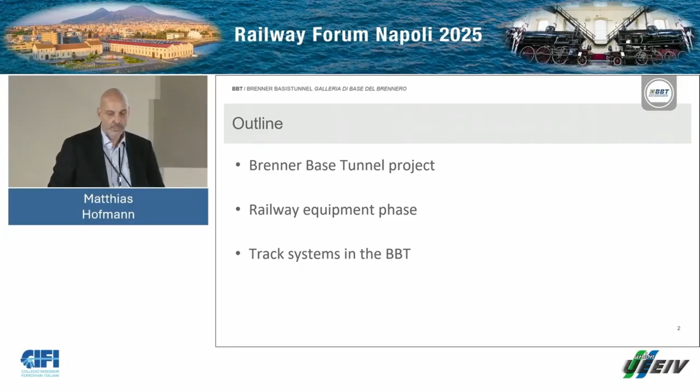As an introduction, I will show an excerpt of a video of the BBT, which gives a good introduction to the project in general.

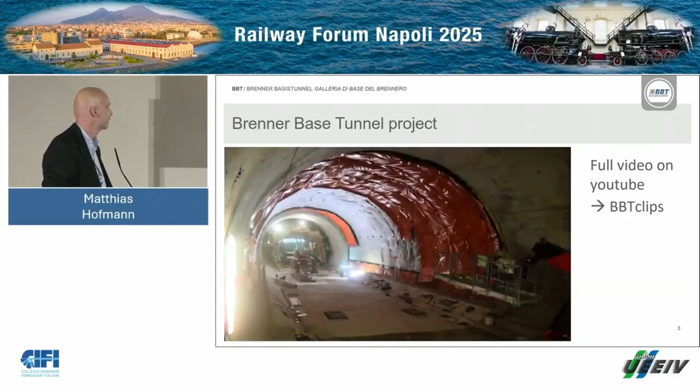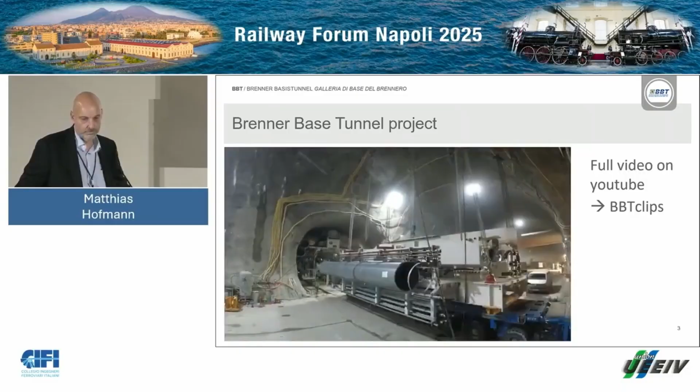Engineers, planners, geologists, miners, and many other professionals work constantly, tirelessly, tenaciously, with precision and skill, 24 hours a day, 7 days a week, on one of the cross-border projects of the century, the Brenner Base Tunnel. All the different groups working on the construction sites and in the offices are like gears that mesh to drive this infrastructure project forward. Implementation takes place step by step, like the steady ticking of clockwork.

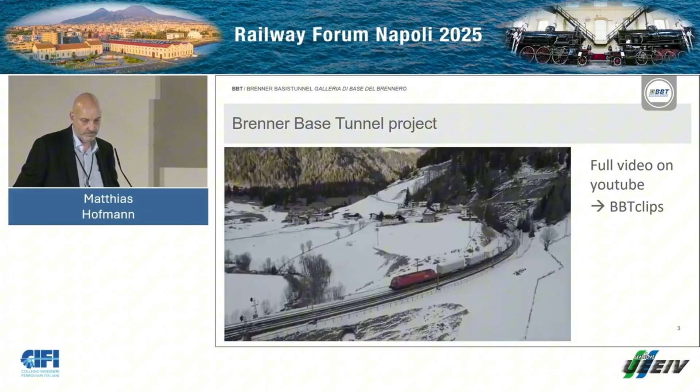The Brenner Base Tunnel is one of the largest infrastructure projects in Europe, as well as the longest underground railway connection worldwide. A goal Austria and Italy are working towards together, a project that will unite Europe. Once the tunnel goes into operation, travel time for passenger and goods trains between Innsbruck and Fortezza will be significantly reduced, with passenger train travel time cut from 80 to 25 minutes. North and south of the Brenner Pass, this will be a significant improvement for residents and travelers.

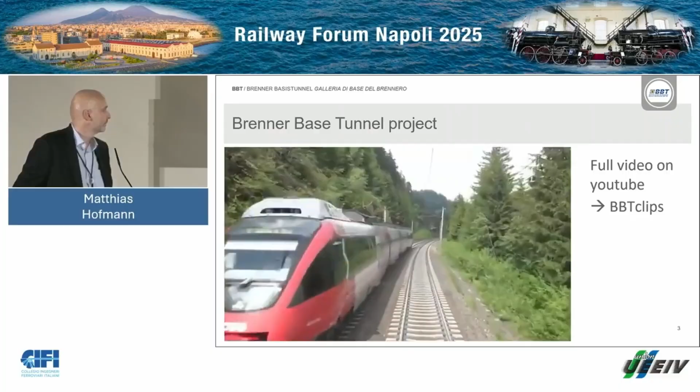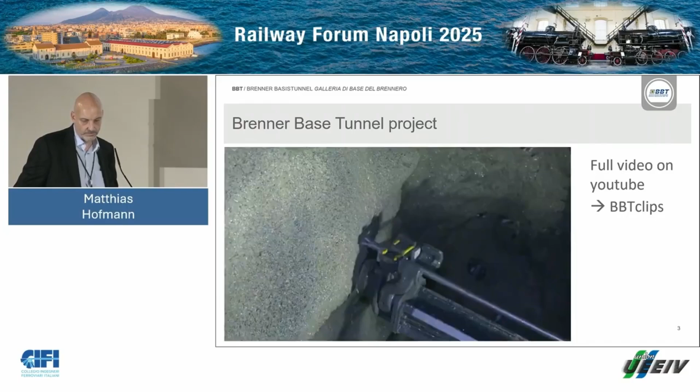If you want to get past a mountain, there are 2 ways to get to the other side: either travel over it with many steep curves uphill and downhill, or go straight through it underground. A lot of people are working on the Brenner Base Tunnel to build the direct underground railway connection between Innsbruck and Fortezza, a railway tunnel at the base of the Alps, offering the advantages of a flat railway over a total length of 64 kilometers.

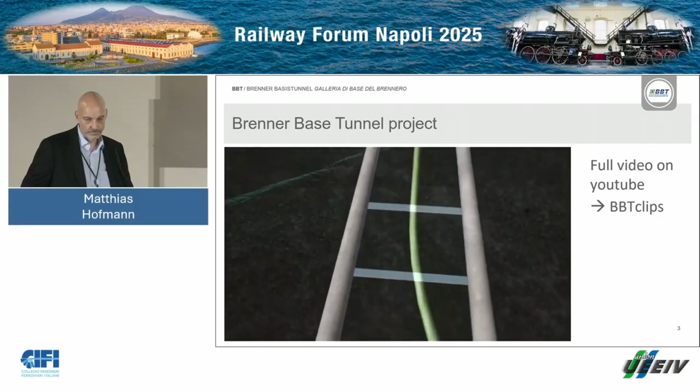The Brenner Base Tunnel comprises more than 220 kilometers of tunnel tubes: 2 main tunnels for the tracks with a diameter of about 8 meters and a cross passage every 333 meters. Between those tunnels, and 12 meters below, is a 3rd tunnel, the exploratory tunnel, which is 6 meters in diameter. This is driven before the others to understand the nature of the rock mass and to find out exactly what kind of rock to expect.

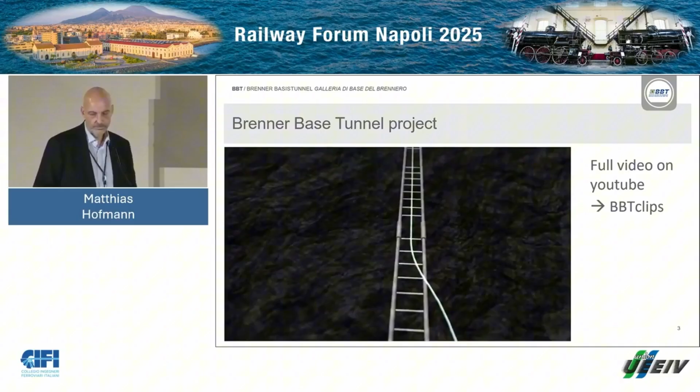Once the Brenner Base Tunnel has become operational, this tunnel can house technical equipment and be used to carry out maintenance work. The 4 lateral access tunnels in Mauls, in Steinach am Brenner, in the Ahrental Valley, and in Ampass are necessary to advance deep into the mountain and excavate the tunnel system from there on several construction sites simultaneously.

It's available on the YouTube channel, so please feel free to watch it in full length.

So why is the BBT built? Here is a sketch of the traffic route between Munich and Verona, and I'll explain the diagram below. On the left side is the traffic currently going over the Brenner Pass, roughly 150 to 160 trains per day, mainly the green bar representing freight trains.

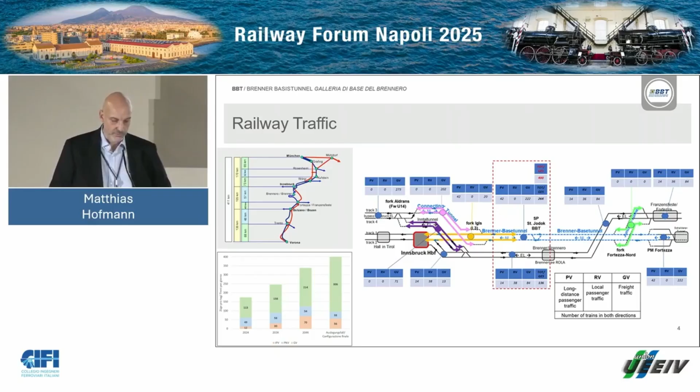The expectation is that in several years, say 1 or 2 decades, when the Brenner Base Tunnel is finished, this will triple, so there will be roughly 400 trains per day over the Brenner, of which 300 are freight trains. That is the need for the Brenner Base Tunnel. For the whole concept of Europe, the Brenner Base Tunnel is part of one of the 9 Trans-European Network corridors, the Scandinavian-Mediterranean corridor, which goes from the very north of Europe down to the south of Italy, connecting 7 countries, with a length of approximately 9,400 kilometers and connecting 110 million people.

On the right side you see again a sketch from Munich to Verona, where the Brenner Base Tunnel is a centerpiece. The special nature of the Brenner Base Tunnel is that it's a cross-border project, meaning I have 2 concepts, 2 nations, and have to sum it up in one project, let's say.

So the Brenner Base Tunnel, in principle, as we talked about before, is a blueprint of the Gotthard Base Tunnel, because it was built before and provided a good base for copying. But there's one important difference, which is this exploratory tunnel below.

And the name is not totally correct. It was for exploration at the beginning, it was for drainage of water at the beginning, conceived, but now it will be used heavily for the equipment phase and for the operational phase. For that, there were shafts built every third cross passage, so every 1,000 meters, you have the ability to go from the exploratory tunnel during operation of the trains up to the cross passages where a lot of equipment will be placed, as well as near the exploratory tunnel, so you can do a lot of maintenance work 24/7.

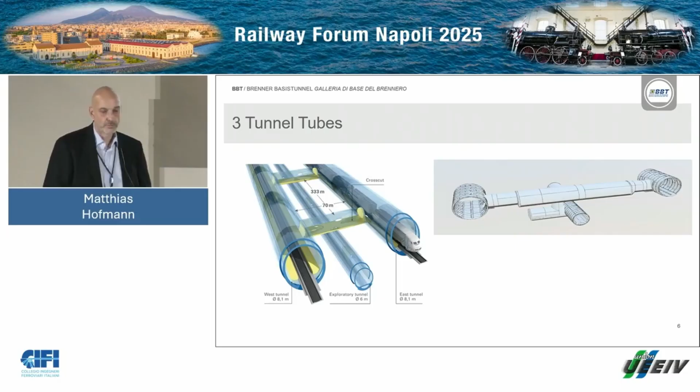So here again a sketch of the whole system, Innsbruck on the left side, Fortezza on the right side, and the whole system, as shown in the video, has a total length of 230 kilometers, of all this main tunnel, exploratory tunnel, access tunnels, and so on. And important is also the link to this existing bypass tunnel, the Verbindungstunnel Innsbruck, Umfahrungstunnel Innsbruck.

And with this connection, so from Innsbruck to Fortezza, the length is 55 kilometers, which would be a little bit less than the Gotthard base tunnel. So we made this connection to the existing tunnel, so it's 64 kilometers, and so it's the longest underground railway connection in the world. One word on the ongoing civil engineering and construction works.

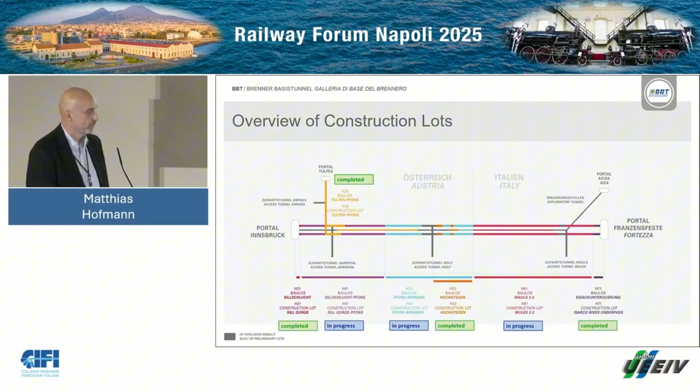This is a plan view, a schematic plan view. This large project is divided into many small pieces for excavation, and the different colors show the different construction lots. A lot of them are completed, but 3 of them are still in progress and will last for the next 2 or 3 years.

So, to sum up, there are in total 230 kilometers to be excavated, 90% are already excavated, so some 25 kilometers are left to be excavated, which will take place roughly in 1 year or a little bit more probably.

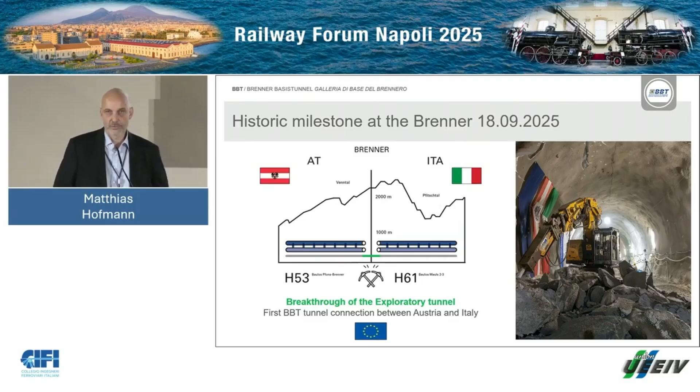The construction of this exploratory tunnel took 17 years in total.

So now coming to the railway equipment phase. Some basic numbers: the design speed for passenger trains is 250 kilometers per hour, whereas for the freight trains it is 160 kilometers per hour. The train length is designed to be 740 meters, and the system is deployed with ETCS level 2.

Another compromise required signaling. Usually you would operate it from one side for the whole tunnel construction. It was a long discussion, and it was decided that here, at the border between Austria and Italy, the Austrian part will be operated from the Austrian side, from Innsbruck. In blue is the new Brenner Base Tunnel, in gray or black below is the existing line over the Brenner Pass. And in principle, the same goes for Italy, that the two tracks are operated from Verona.

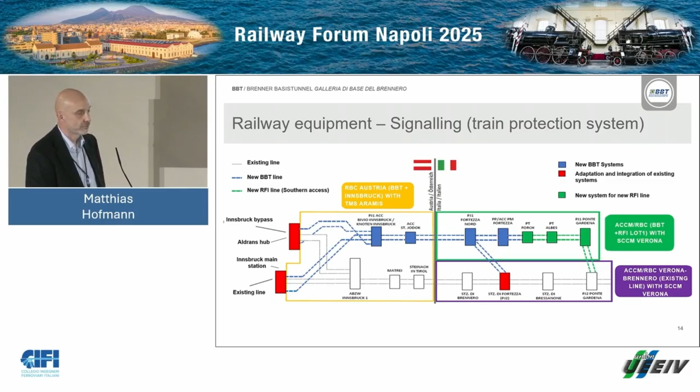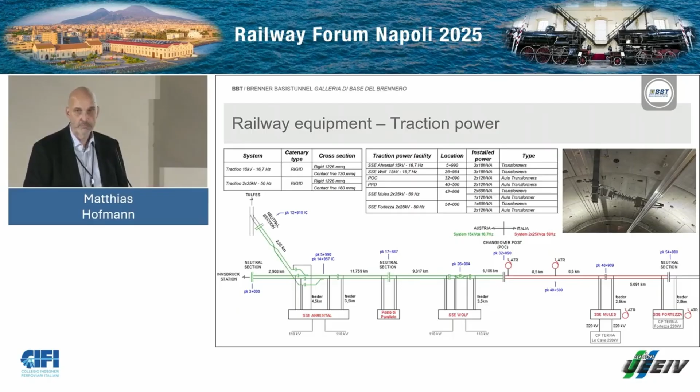Another lengthy discussion was about the traction power system, and finally, again, a thing which is not logical at first sight: there will be a separation of the track power systems. In Austria, here in green on the left side, there will be the standard traction power system from ÖBB, which is 15 kilovolts and 16.7 hertz. Whereas on the right side, here in red, there will be the traction power system with 25 kilovolts and 50 hertz, which means there's a power-free section underground, some 1.5 kilometers below ground.

And there are other railway equipment issues. I won't go into detail, because in future we will focus on the slab track going forward.

Before that, a quick outline on the time schedule. A project like this, similar to the Gotthard Base Tunnel, lasts roughly 20, 25, 30 years. In our case, it started in 2004, 2005 with the authorization phase.

There, the civil works as well as the railway equipment works were first designed and given to the official bodies and approved. Then the focus was on the civil engineering construction for the next years, from 2008 on, where the approval was here. And now we are here in the middle somewhere, where in parallel last year the design update or optimization of the design of the railway equipment took place.

One important update is that the exploratory tunnel will be used as a service tunnel in future, meaning as much work as possible will take place using the exploratory tunnel or service tunnel. We hope this will have a great benefit on the availability of the track, of the railway system. Then the plan is next year or the year after to make the build tenders for the railway equipment phase.

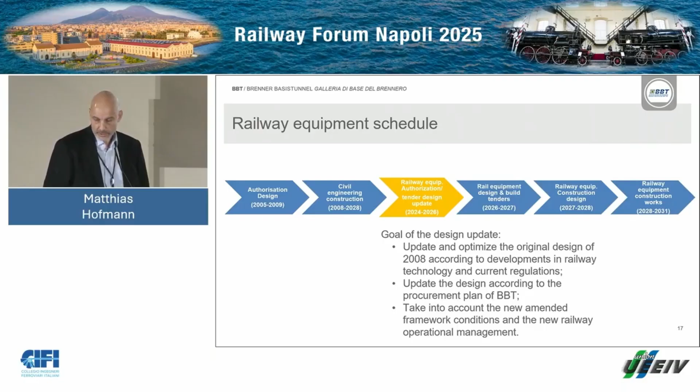So, let's come to the track system in the BBT. We have all kinds of track systems in there. The main track system will be the SLAB tracks, and a certain area will be built with a mass spring system. But we also have ballasted track systems, and so we have transition zones between these systems.

Regarding the tracks, the SLAB track system has the principal requirement that it must fulfill the requirements of Austria, of Italy, as well as international standards, mainly the TSI. In the first phase, in 2005-2009, it was decided there will be precast slabs used, laying on the base layer and possibly with a separating layer between them, like we heard yesterday some examples. The width and thickness are standard, roughly 2.5 meters and 20 centimeters height respectively. This is typically the system widely used in Austria and Italy at the moment.

Regarding the rail itself, it has to fulfill the typical specific Eurocodes, and the standard track gauge is of course roughly 1.4 meters.

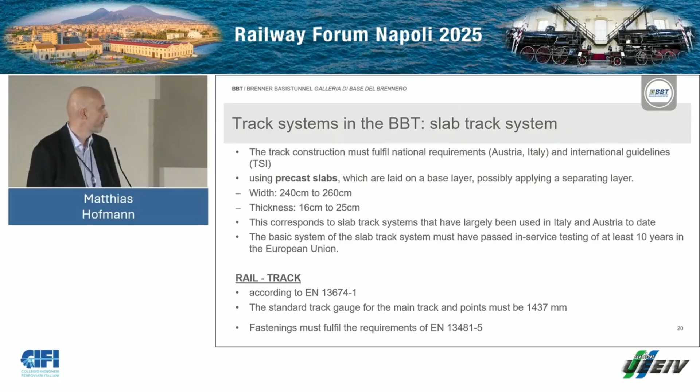There are also parts near the portal with low overburden and some villages and people living above. Especially in Austria, due to the existing Umfahrungstunnel Innsbruck, we know there is vibration transmission to the houses. So there will be a mass spring system added to mitigate these vibrations.

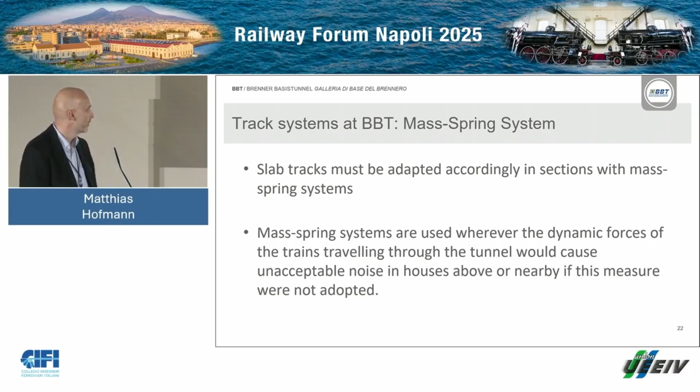Finally, there will be ballasted track areas, especially near the portals where the existing tracks will go inside the tunnel for some meters with a ballasted track system. I will come to it in a minute.

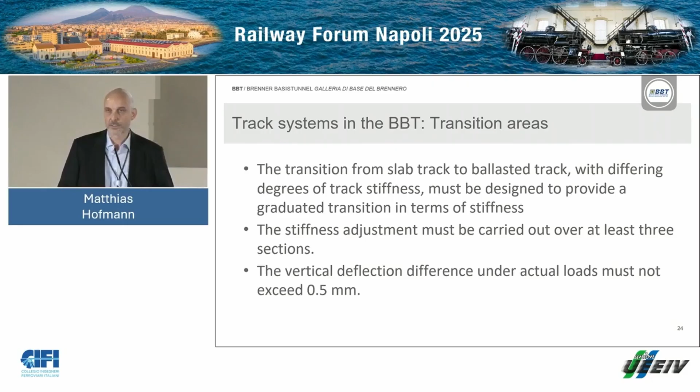As there are different systems, there are transitions between them. I saw there will be a presentation afterwards, so I won't go into detail, only that this transition has to be in several steps, and the differential deflection between the steps must not exceed 0.5 millimeters.

The reason here is because this is a very difficult geological structure. The slope is not stable - actually 'not stable' is the wrong word, it's a creeping slope. So there's the possibility that the whole tunnel can deform some centimeters up to decimeters, and with the ballasted track we have the possibility to readjust the rails.

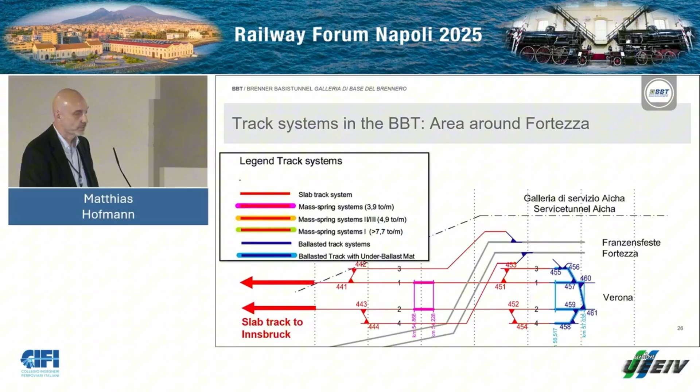With that numbers, I come to the end of my presentation. If you would like further information for the introduction, please go to our website, there is a lot of information there. And with that, I thank you very much for your attention.

Here are some quick technical details about the tunnel. This tunnel passed through residential areas, so the cut and cover method was chosen to reduce noise and improve safety. Inside the tunnel, we used a slab track system instead of ballasted track. This system is more rigid, needs less maintenance, and offers better long-term reinforcement. For the structural analysis, we use SAP 2000 software and consider UIC LM71. For materials, we use high-strength C30 concrete and S420 reinforcement steel.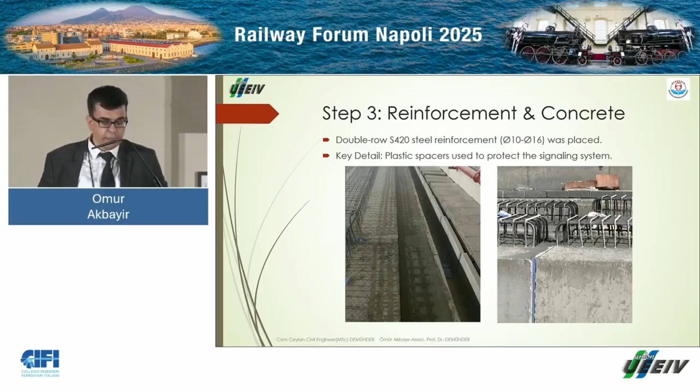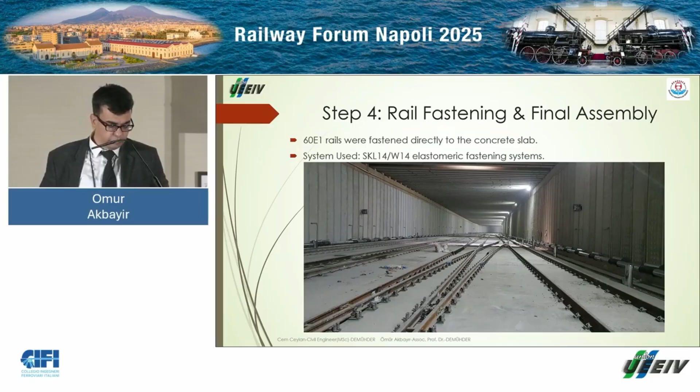Finally, step 4, rail fastening and final assembly. 60 E1 rails were fastened directly to the concrete slab using the elastomeric fastening system. This system reduces vibration and allows thermal expansion. As you see in the photo, we integrated 4 large switches or turnouts directly into the concrete slab. So, we built this rigid track.

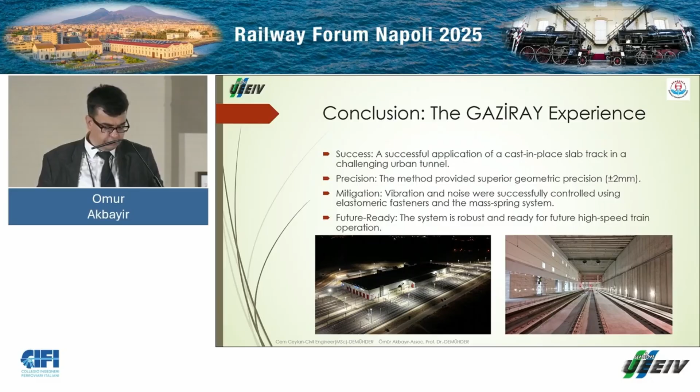In the existing tunnel, you can see the tunnel vault. The tunnel vault is done with natural brick stones, with natural stones. You can see already the existing slab track. The existing slab track was installed in the years 1992 and in the years 2004. Under the slab track, you can see the base channel, the drainage channel, and on the side, the cableways.

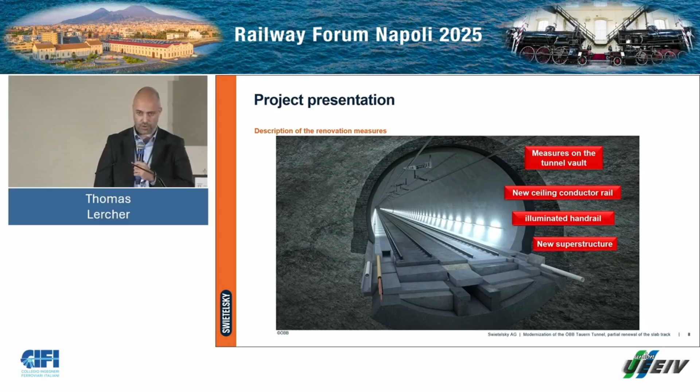The new tunnel should look like that, and it does. There were heavy measures on the tunnel vault. You can see not anymore the bricks. It was shotcreted. A new ceiling conductor rail, illuminated handrail, and the work we executed, the new superstructure in 1/4 of the tunnel.

As I mentioned, you can see here an overview of the tunnel itself. Here you can see track 1, you can see track 2. Track 1 was renovated in the year 2004. Before that, both tracks, both lines, had the ballast track.

In the year 2004 they installed the ÖBB-Porr plate system, slab track. Even in 2004, they did like 1 kilometer around the northern portal and 500 meters in the middle of the tunnel. And 12 years before, in the year 1992, they did also the plate system from ÖBB-Porr, slab track system, and a single sleeper system, also by ÖBB-Porr, the single sleeper system with roughly 4.2 kilometers. And exactly this red area was the heart of our construction site. This single sleeper slab track system we had to change.

We did not change only the slab track system over the 4.2 kilometers. Additionally, in the remaining three-quarters of the tunnel, the whole track in the north part and the south part, we changed the rails, and we also replaced the supporting points, the screws, and the fastening systems.

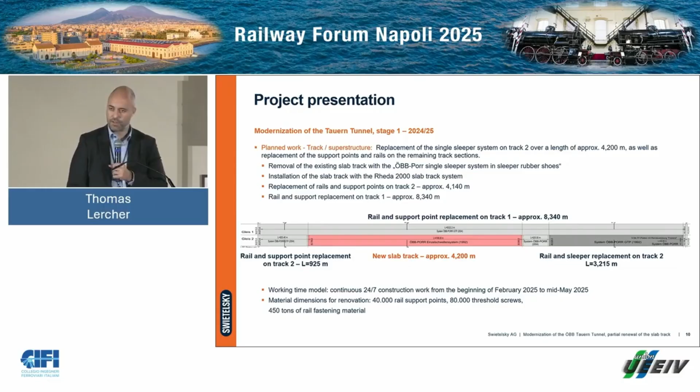Now the system overview. As I mentioned, there is a single sleeper system inside these 4.2 kilometers, built in 1992. The single sleeper system is in rubber boots, rubber shoes, and is grouted under the sleeper with a 4 centimeter thick grouting concrete, and underneath this grouting concrete a 14 centimeter thick layer of reinforced sub-base concrete.

From the fastening system, there are W14 rail fastenings, and they are installed on the single sleepers.

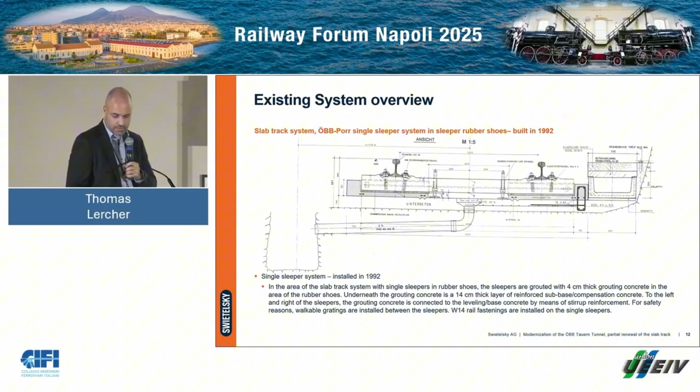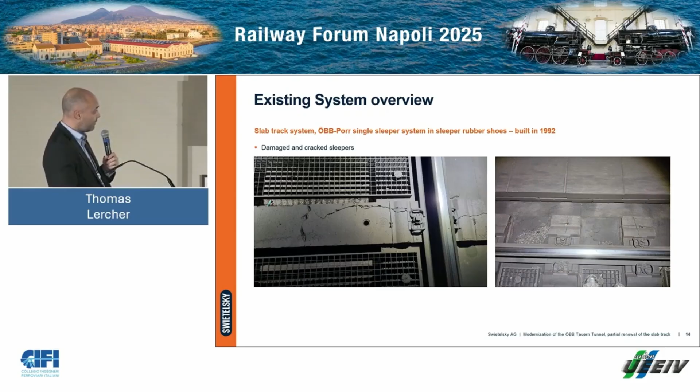I brought some pictures directly from the construction site. You can see here the old single sleeper system. Now you can see the reason why we had to change this slab track. The reason was that the old sleepers, the single sleepers, got already cracked, quite many of them. I brought some pictures.

We decided to install, instead of the single sleeper system, the Rheda 2000 sleeper system, with the system we already heard about yesterday in the presentation from RAIL.ONE.

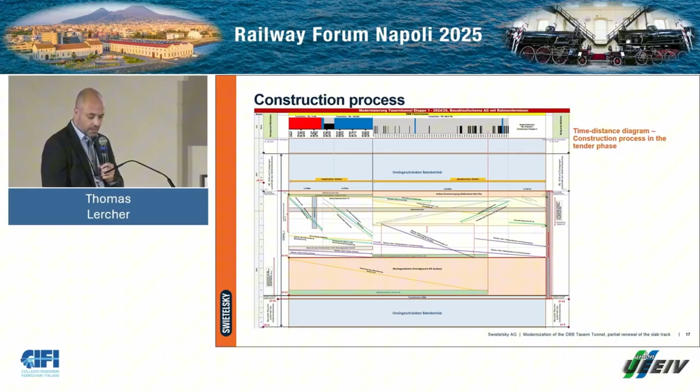Out of the first time distance diagram, of course, during the construction phase it becomes more and more detailed, and became quite long already. I'll show you some details out of it. As a construction company, we did it in our mother tongue, German, but I will explain the working steps in detail.

We had to do some cleaning work. We started in the south doing some cleaning of the existing tunnel, and we had already to do the taking out of the old slab track. We removed it as fast as possible, deciding to do it with 30 meter track panels and our railway crane.

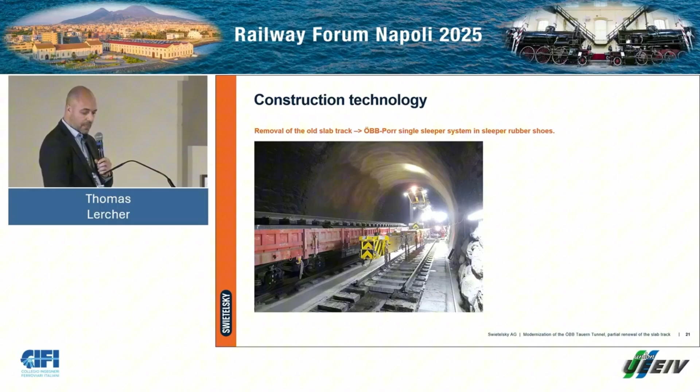We removed these 30 meter track panels and loaded them with the crane onto flat wagons parked on the neighbor track. These track panels we then moved out from the tunnel and brought them for disposal. That worked quite well, quite fast.

Of course, the remaining slab track, the concrete and the rubber boots you can see in these pictures. The rubber boots we then also put out with the excavators and could then clean the surface.

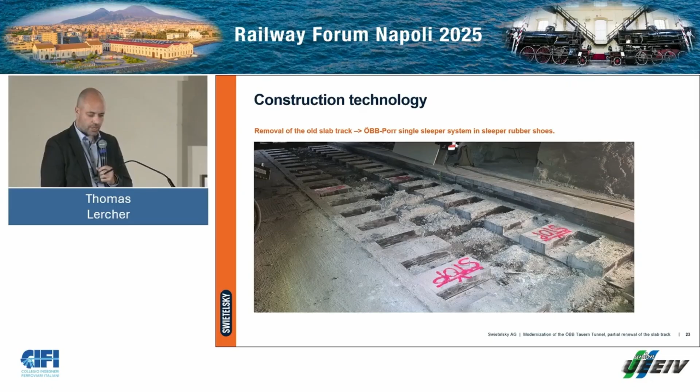Next to taking out just the track panels, we also started in parallel to change the rails and the fastening systems. I will not go into detail, but here you can see all the parts we had to change, starting with the rails and changing all the fastening systems over the 12 kilometers where we did not change the slab track.

That was the tunnel we found. You can see now why I said there were quite impressive works to do to get rid of the water inside the tunnel. There were heavy contaminations inside because of the 120-year-old tunnel vault. Of course you can imagine that all this water and heavy contamination is not good for the fastening system, not good for the infrastructure inside. Because of that, the tunnel had to be renovated and we had to change the fastenings and the rails.

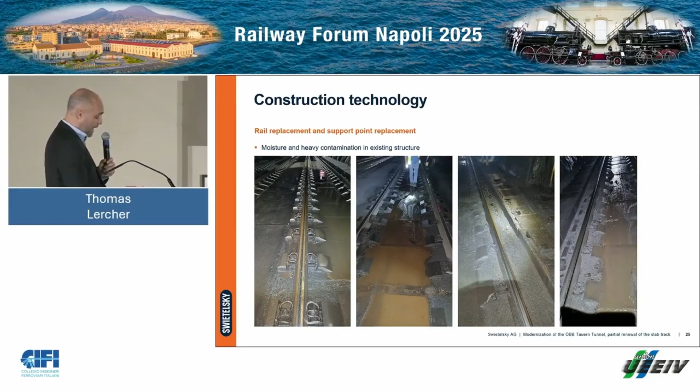What happened because of all this water? We found screws like that. So mechanically loosening these screws was definitely not funny.

And we even had broken materials, a lot of broken materials inside of the tunnel. When we tried to open the screws, they had, of course, looked like that. So how to get them out?

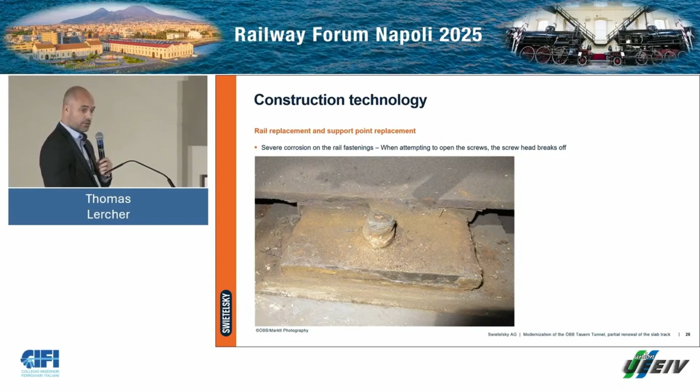We were really lucky that ÖBB is really experienced in that already. Over the last years, they even designed and developed materials and special tools to get out these screws. So in cooperation with ÖBB, thank you very much for that, we could also build a drilling machine like this one. We built 2 drilling machines and also invested in many special tools to get out all the screws. I will not go deeper into details how we got out the screws. Maybe in the next coffee break or lunch break we can talk about it. But it worked quite well.

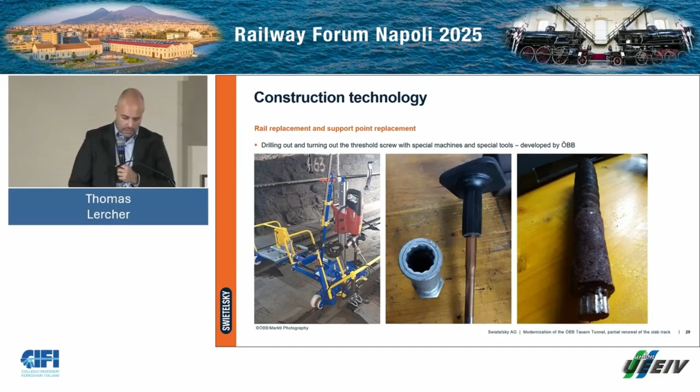As I mentioned before, it was planned to come to a hard bottom, to stone or to concrete. What we found was the old ballast from the ballast track, from before the year 1992. So of course, on this underground, we could not place the new slab track. We had to dig out about 3,500 cubic meters of old ballast, remove it, and transport it out with the tipping wagons onto the neighbor track.

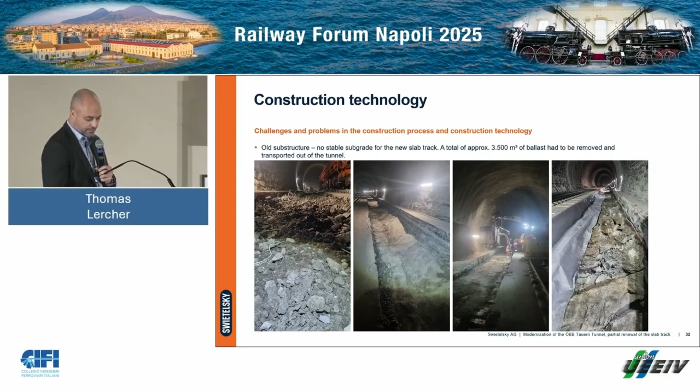That was then the cleaned surface of the underground. Here you can see it really well, it looks like the moon. And it was prepared to concrete and to put in a layer of concrete.

We had other challenges and problems during this construction because the old cable channel, which was already more than 30 or 40 years old, got broken too. We could see that already in 1992 they had to fix it there. So this we had to remove and change.

Also the drainage channel in the middle of the tunnel was done with natural stones, with rocks, of different sizes. You could see it here. Of course, these rocks were integrated into the concrete of the old slab track. So we even had to cut the rocks so that the drainage channel would not break down completely, in order to reach the 2.5 meters of space we needed for the new slab track.

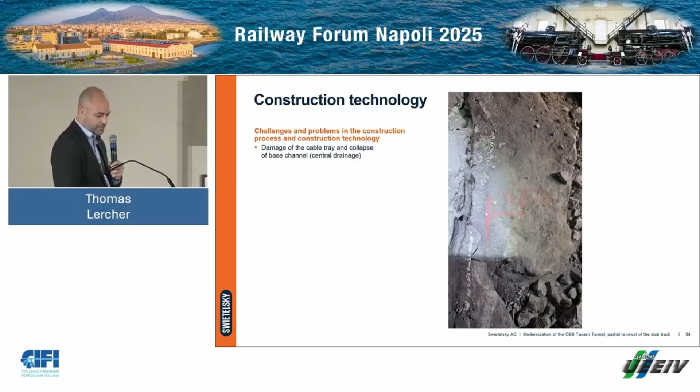So when we reached this point, everything worked according to plan. From this point onwards, everything worked in plan. The old system was deinstalled. We could concrete the new leveling concrete, the base layer. We did it with conventional mixer trucks, going in with wagons and filling in the concrete.

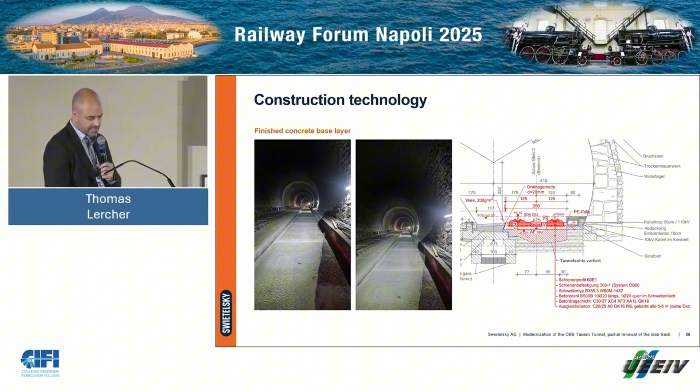That was the finished concrete base layer. You could see in the design it was planned that we have a good base here. We had to fill in all this concrete, and of course we also had to fix some parts of the base channel.

The next step was to put in the sleepers. We put the sleepers there conventionally with our excavators. That was working quite smoothly. Then we put in the reinforcement.

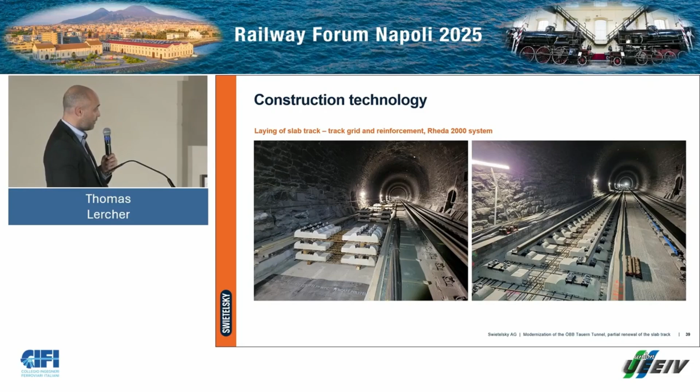Then installing the lifting and alignment system. For the lifting and alignment system, we also had to be a bit smarter, since we could not install it on both sides. Usually you can install it on this side and on this side, and just by putting pressure on the bars bring it into the correct position. The lifting work was easily done with our spindles, and we had to develop the alignment system so that we can fix it on the rails from the neighbor track and on the rail from the new track, and do it with the tensioning parts, so that we can tension it and also press it to the correct level.

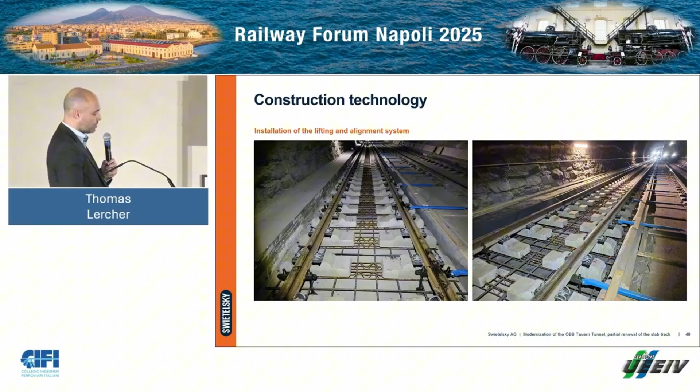Afterwards, we went for concreting. For doing the concreting, we made some examples, some tests. You can see here that we formed these boxes with a piece of sleeper and a plexiglass, and we could then see in the video, when we fill in the concrete, how it reacts underneath the plexiglass.

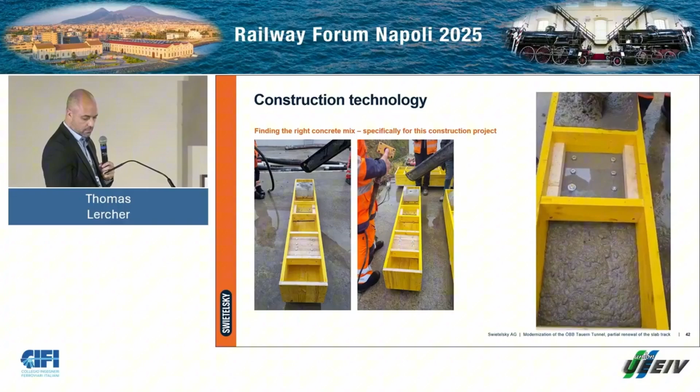Worked quite well. We unpacked these boxes. First results, we were not happy, definitely not. You could see that air was on the surface and water was on the surface. And finally, we became better and better, and we found our correct recipe.

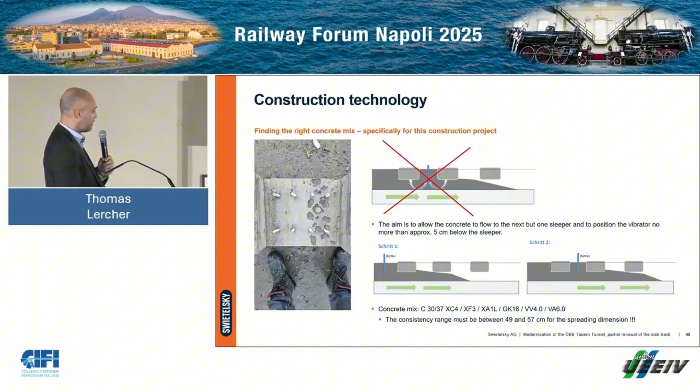We put in the concrete with a paver. On the paver were mixers installed, what could mix the concrete once again. And we put it efficiently on the construction site.

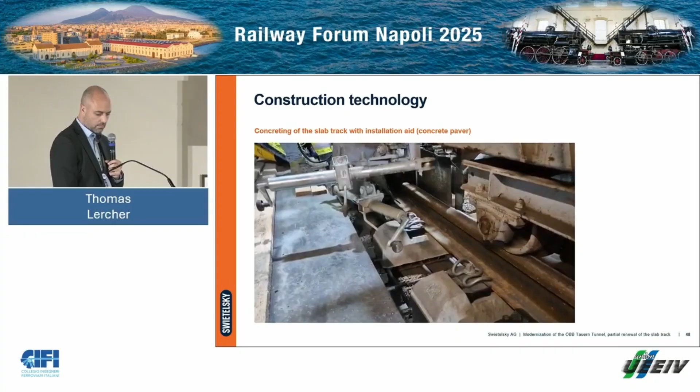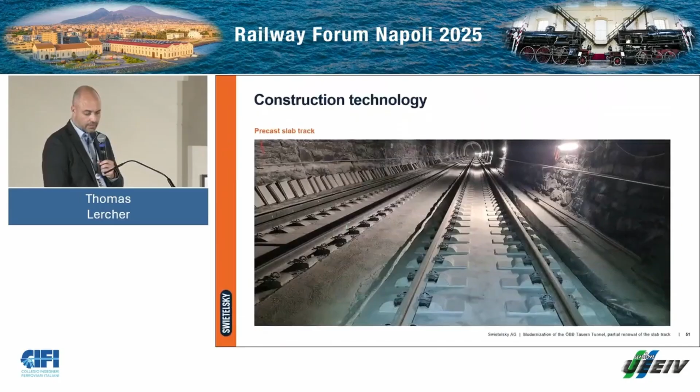You can see the concrete flowing and coming underneath the sleeper. Afterwards, doing the concrete surface, conventional, bringing on the applicated evaporation protection layer, and we had our new slab track installed.

The last steps have been welding of the rails, transporting out of the tunnel the old rails, and the project was done. Thank you very much.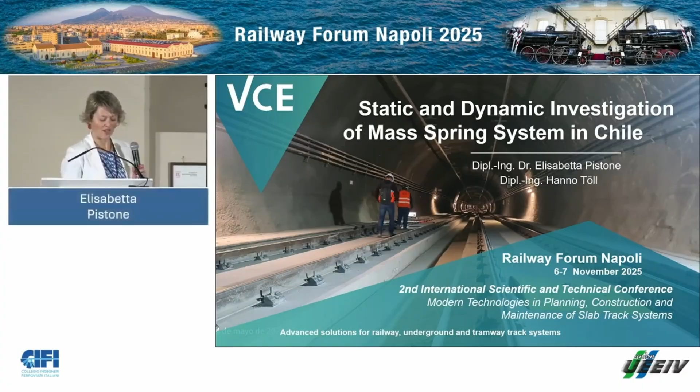I will briefly go through an introduction of the project. I will mainly concentrate on vibration studies, although I will briefly talk about static and dynamic design and the construction and manufacturing as they have influences on vibration studies. And I will finally elongate a little bit on site measurement, which is something we have not been hearing so much in this conference, in this forum.

Before that, I will spend a few words on VCE. Although many of you know us and we have a long-standing and successful collaboration with some of you, I think it is worth mentioning that we are an engineering office with headquarters in Vienna, although we have branch offices also abroad, mainly depending upon request of projects, I would say.

We cover pretty much all the fields in engineering, spanning from bridge design, track design, traffic, noise and vibration—this is my department—life cycle. In the last years, we also had the development of BIM, and research and development is always the key. It was founded around '86. We have more than 350 employees, experts in different fields.

And our projects cover pretty much the globe, I would say. Of course Europe—Germany, Austria, Italy, geographic Europe, as UK. But we also have, like yesterday my colleague explained with POR as well, some projects in Qatar, we have in India, and here we go in South America.

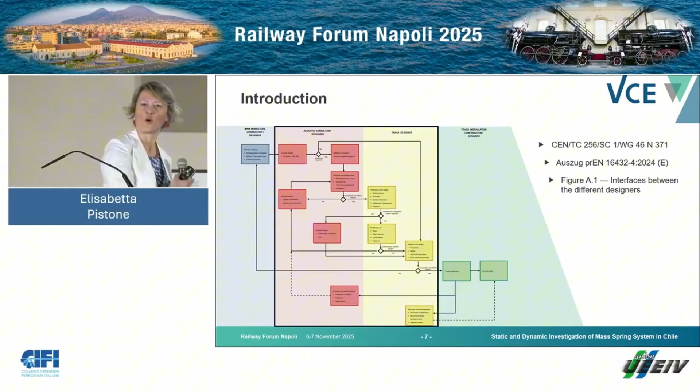From a theoretical standpoint, when it comes to acoustic and vibration, this should be the path to follow. Although it seems either a series or, for some aspects, a parallel system, it is actually a loop system, which means that each block at the end of the process had always to answer a question: yes or no. If yes, you could proceed to the next phase, which maybe leads to another interface. If no, then you have to go back—meaning to optimize the system, change something, revise what you have done.

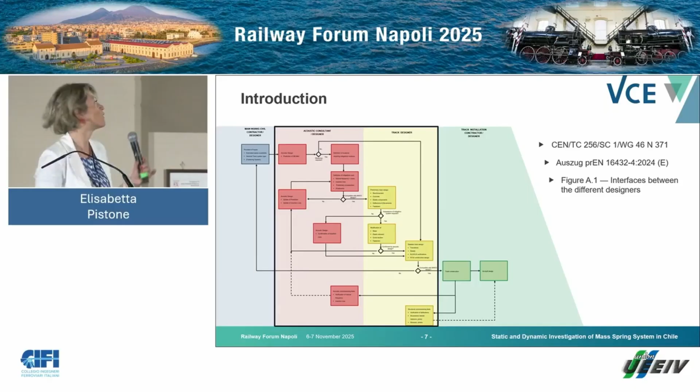For instance, in the case of noise and vibration, if you have a definition of the mitigation system, you have to calculate natural frequencies, insertion losses, preliminary cross-section. If this is compatible with the main civil construction work, you could proceed to the track design, for instance calculation of preliminary reinforcement, concrete, and so on. And if adaptation of the mitigation system is required, then you have to go back and readapt and optimize your system. Otherwise, you could proceed. This is pretty classic—seems easy, not always so smooth.

As far as vibration prediction is concerned, the main key point to answer is always the calculation of emissions, which comes from a contribution of different aspects: train emission, insertion losses, soil—of course propagation through soil—the coupling with the building, as well as the building transmission itself, and a safety factor always included to account for uncertainty.

So if you look at the picture, you have a source, a train passing, for instance, in this case, in a tunnel, presuming a tunnel, so we have a certain depth, which will have its own insertion losses depending on the system you consider. The vibration will propagate through the soil, which has an influence until it reaches a building.

Of course, when you analyze a line, on the old map, you cannot take every single building along the line. You have to spot what is called a sensitive receiver. In this case, we are following the FTA, which means receivers, buildings I would say, that could be representative for a category. So it could be depending upon usage, residential rather than schools, and also about importance and vicinity with the rail.

Then, of course, the vibration propagation will reach one of the sensitive receivers. So let's say the building will transmit through the foundation, depending on which they are, and then it will propagate through the building itself, so depending on the stories with the transfer spectra. So this was the image, and of course the process according to FTA is very, very similar.

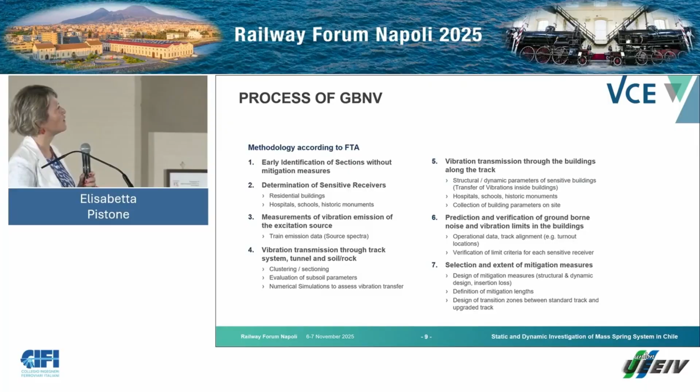So you have to determine, as I was saying, the sensitive receiver, measure the vibration through the excitation source, so the train in this case, which will go through the soil itself to the building until you can calculate and predict effectively the ground-borne noise and select if you need mitigation measures. Could be yes, could be no. If yes, into the detail, which ones are they?

They actually chose 4 different systems. One was sections without any mitigation measure according to their analysis. One system was with elastic rail, so elastic soil, and 2 mass spring systems. The same exact mass system, the only difference was the thickness in the elastic mat. In one case it was 40 millimeters and in the other case 50 millimeters. Why? Because they had constraints upon the frequency.

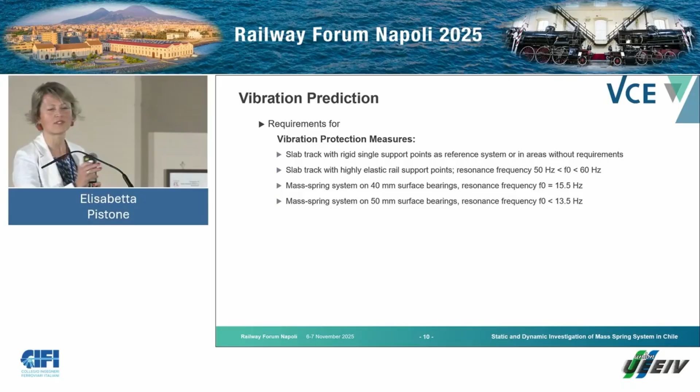We can discuss optimization at a different stage maybe, but these were the requests. So one was 15 hertz and the other was a little bit lower, so 13 hertz. So this is pretty much the mass spring system, and the difference was in the thickness of the mat that they adopted.

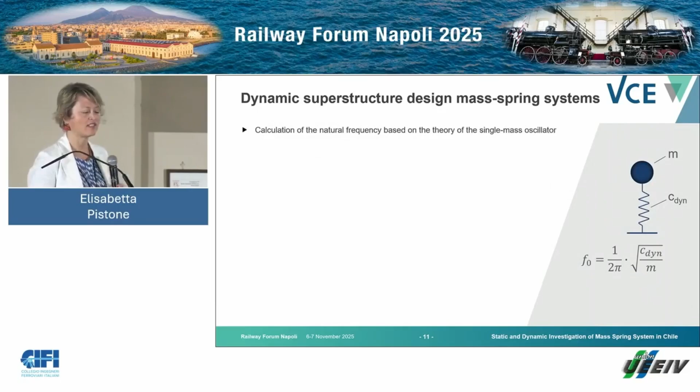We also calculated and performed an analytical study to determine the dynamic stiffness for the bearing and the effective dynamic masses. And of course we did static calculations in collaboration with another department to calculate the reinforcement quantity and the verification according to different states. I'm not going to elaborate a lot because this was just an input for us for the noise and vibration part.

After that, we were finally requested to test, and we tested both in part as a mock-up test, before putting it into place and operation. I'm not going to talk about this stage for sake of time.

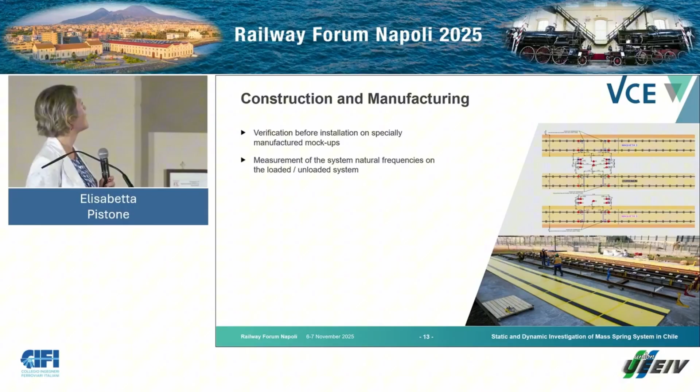I'd rather concentrate on the measurement when the system was put in place to detect the natural frequencies of both loaded and unloaded systems. And of course we also had to consider the contribution of soil because we were able to test it. Not always is this possible; sometimes you have to simulate this propagation. In our case, since we were able to test it, we could directly compute it.

So this was what the theory computed and what the mock-up test told us. And when we finally tested in reality, we could also take into account the ground correction. So the first step is to compute the insertion loss. The insertion loss is always basically a measure of the performance of a system that you are putting into place.

In this case, a mitigation measure, in comparison with a reference system. If you also want to add the ground correction, the right thing to do is to compute the transfer function, which is, you are performing a test on a system, so it's always an output of an input.

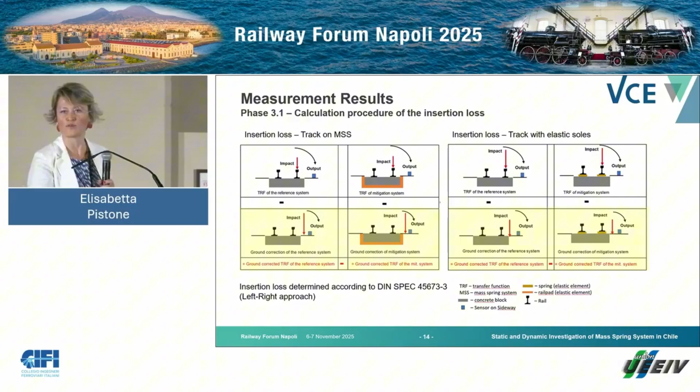You can do the same thing on the track with elastic soles. The difference between the two procedures is the location point for impacts, but the concept itself is the same.

In our case, we did three types of campaigns in situ. One was for the unloaded system, without impact, because you can have either static or dynamic impact - static impact is from a hammer, for instance, and dynamic is the train passing itself. So the first step was testing the unloaded system, to detect the natural frequencies that we had computed earlier from a theoretical standpoint.

There was a very good agreement, especially with the mass spring system. You could see the location of the impact and the receiver from section and plan, and the result of the natural frequency - so the natural frequency was actually proven correct.

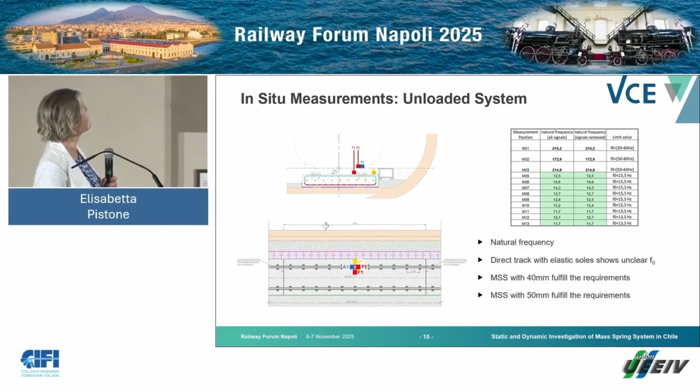We did the same, but then with the static loaded system, meaning we carried out 15 to 20 impacts with the hammer - this is pretty much what the norm says. Why? Because you have to average, in case of outliers, to increase the statistical population.

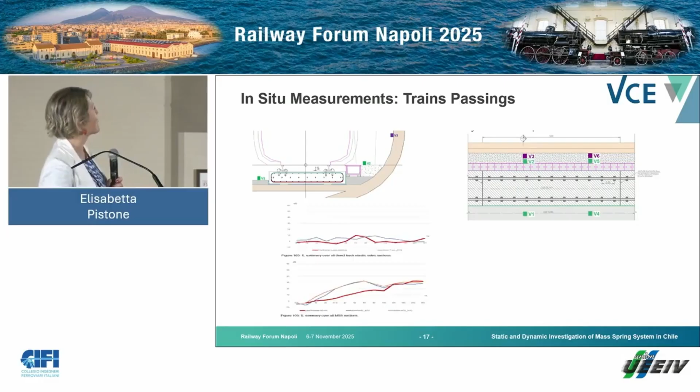We recorded train passing, with velocities around 50 to 80 kilometers per hour, and also in this case we could compute the insertion losses, both for the elastic support and the mass spring system. Also here we had a pretty good agreement.

In this case, since the train is passing, the sensitive receivers are actually 5 meters apart from the tracks, by norm. And also in this case, we're good.

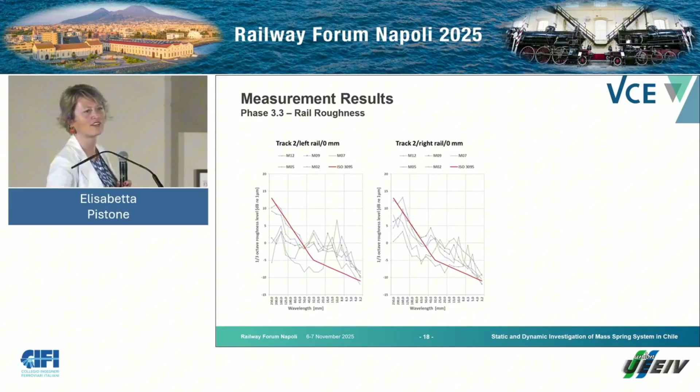I added this slide because yesterday we had a very nice presentation about rail roughness, so we also did a short campaign on rail roughness.

In our case, we had some trouble while measuring - we had a pretty good agreement until about 50 millimeters, then after this we had some problems. But at least the vibration due to the rolling wheel was comparable and reliable from the statistical data.

So the outcome of the whole project is that generally vibration engineering and track construction planning are carried out by different planners, but early involvement allows optimization of the system. Interfaces, in this case, must be defined as a process that is iterative, not just theoretically but also practically.

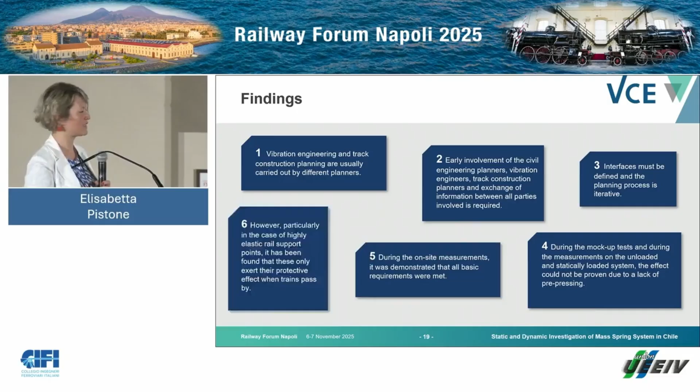This is what happened in our project, where we had both the mock-up test and the test measurement. Although the results are not always perfect, it was demonstrated that all the basic requirements were met, so it was considered a successful example from our side.